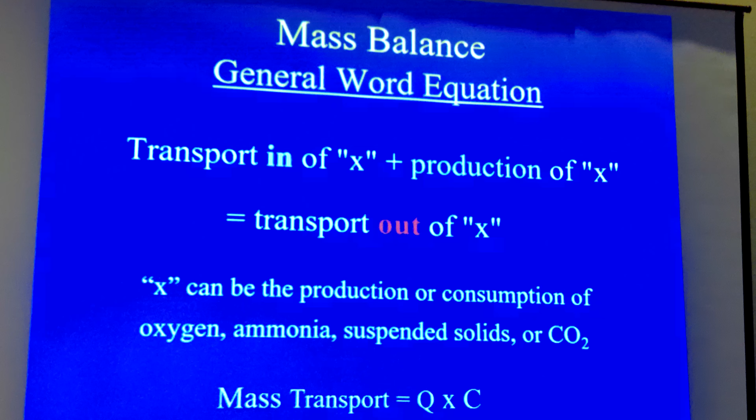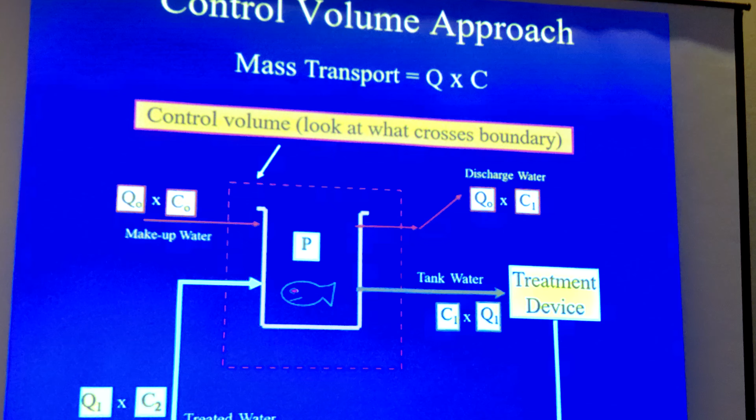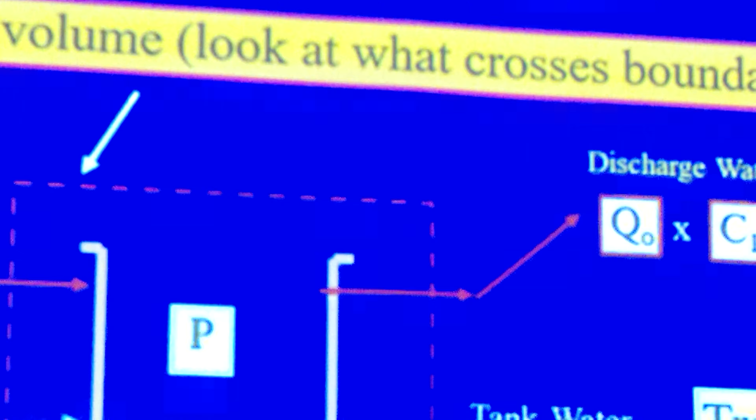Okay, so the key here is this flow diagram. Just look at that a long time. Engineers like to think of a control volume, that's the little dotted lines. And so that says, okay, that's what we're going to focus on. So things coming across the control volume line - is there a pointer? This black thing? Okay, so here's our control volume. So everything crossing this is the mass balance. So transport in - we have something coming from the outside. Those are makeup water.

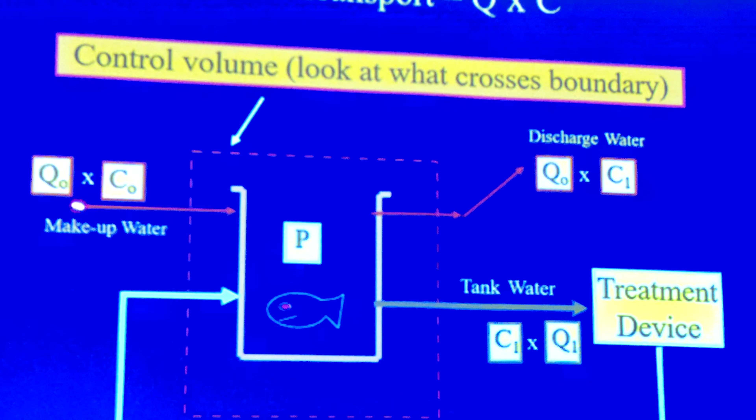If you had no makeup water, that's zero. Then we have things leaving - there's some discharge, and water that leaves goes through a treatment device and comes back. You don't see the treatment inside the control volume, just what's coming back in. So we have flow in plus the production of something equals the flow out of stuff.

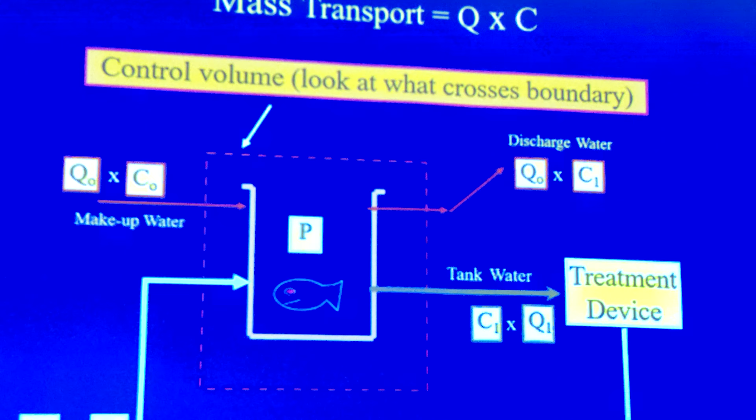So you set that up mathematically. Q is the flow term, this is the concentration term, and there it is mathematically.

Typically your makeup water is very small, so if you're doing rule of thumb quick calculations, you can just cross that off. In fact, as Bert was saying, what is the makeup percentage? Maybe it's like 10%.

What's our flow rate going around in circles? Let's just say it's once an hour to keep the math simple, or maybe twice an hour. So in 24 hours, that tank is going to turn over 48 times. Let's round it up to 50. And if we're doing recirc, 10%.

So put 50 in a percentage. 50 as a percentage is 5,000. So 10% over 5,000, you can just throw it away. Does that make sense? Even if it was 1 tank a day of throwaway, that's 100%. 50 is 5,000 - that's still 1/50th.

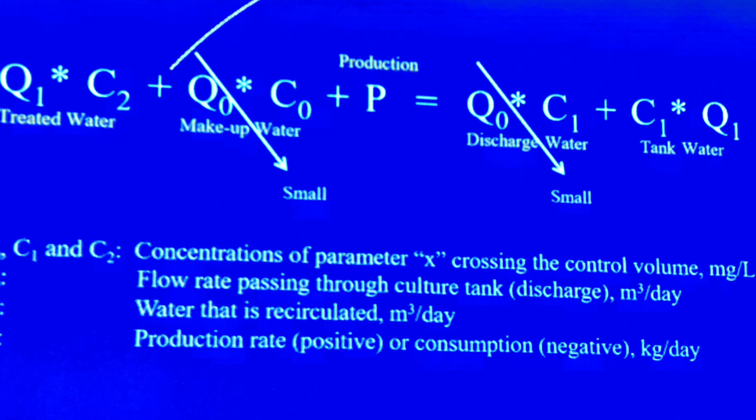So it's all about this recirculating term going around in circles.

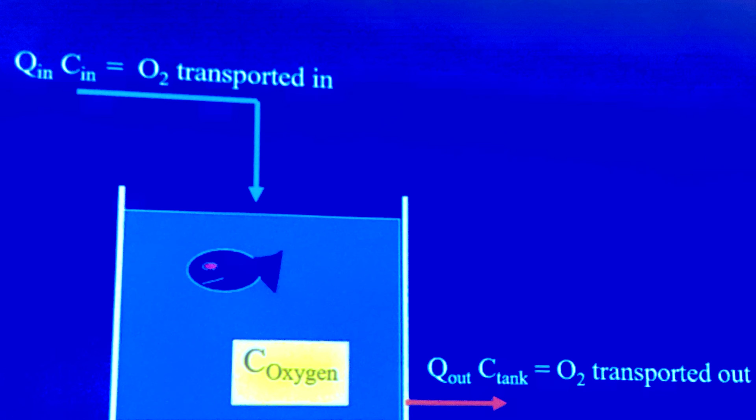So there's a unit balance - I won't bore you with that. There's our mass transport term. So I'll do a calculation for you, as an example, like available oxygen coming back into the tank, Q times C.

Let's do, in English, 100 gallons per minute. We change that into liters off the pump, so we get times our concentration in, and what we say, okay, saturation, at 9.8 milligrams per liter. So that gives us 5.39 kilograms per day of oxygen.

So, rule of thumb, is it for every kilogram of feed you feed, you need about a kilogram of oxygen. That's a rule of thumb.

So to trick my students, I used to trick Ed Anderson as one of my students - I used to trick him easily all the time. I'd say, so if I got 5.39 kilograms per day of oxygen, it takes 1 kilogram of feed per day, how many kilograms of feed could I do? And Ed would say, well, 5.39 kilograms. I say, wrong. Why is that wrong?

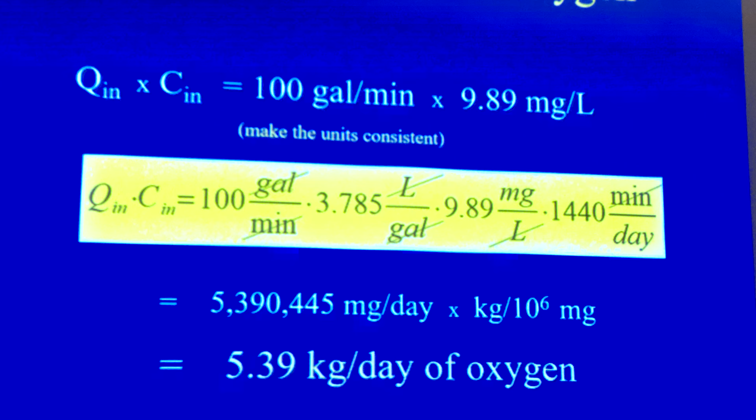Think. Why is that wrong? Because that would be if I took all of the oxygen out to 0. So you have to have some oxygen left over. Then the class quickly catches on.

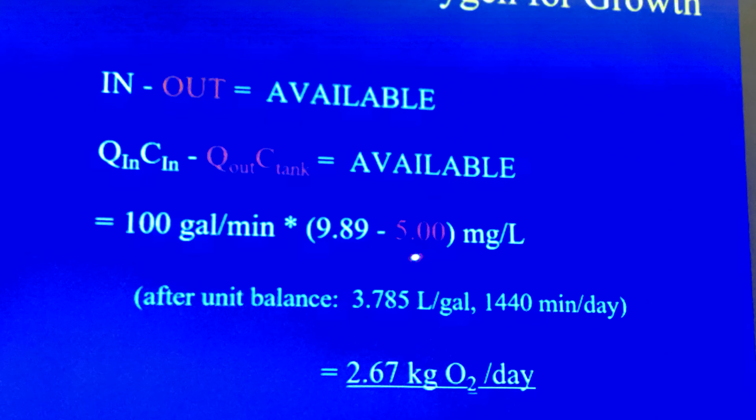So we talk about available oxygen. So maybe a design value for the tank might be 5. So now you got your saturation coming back from the treatment system or whatever, and then we have 2.67, for example. So this is one of the tricky parts - what do you set as your value for the treatment system to achieve to bring it back into the tank?

And so I'm an engineer, and so I'm kind of biased towards that. If I would talk to my, no offense to the biologists, how many engineers are in the room? Have any degrees in engineering? See, we're kind of the minority, right? It's kind of a funny thing, right?

So if we talk to our biology friends, they say, well, what do you want for the oxygen? And the biologist goes like, well, saturation, or something close to saturation. I go, well, we could do that, but I may not stay in business very long because it's going to cost you too much. So maybe we need to talk about economic optimal - that's going to first be below saturation.

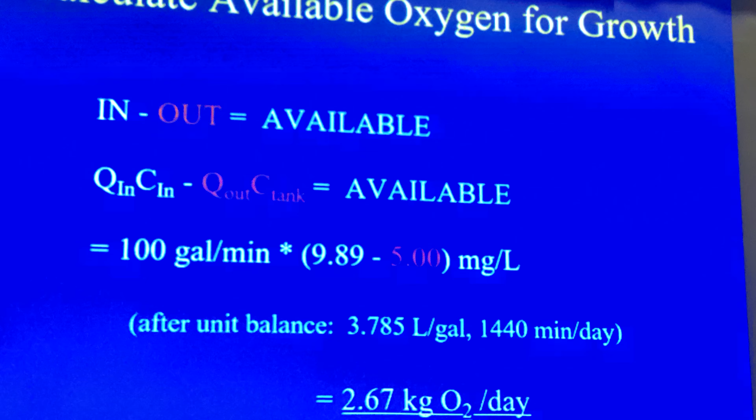Okay, anyway, have those again. So this is your job, as the designer or the consultant, to come up with these values that you're going to select. And there's a warm water species, tilapia, and cold water species, salmon.

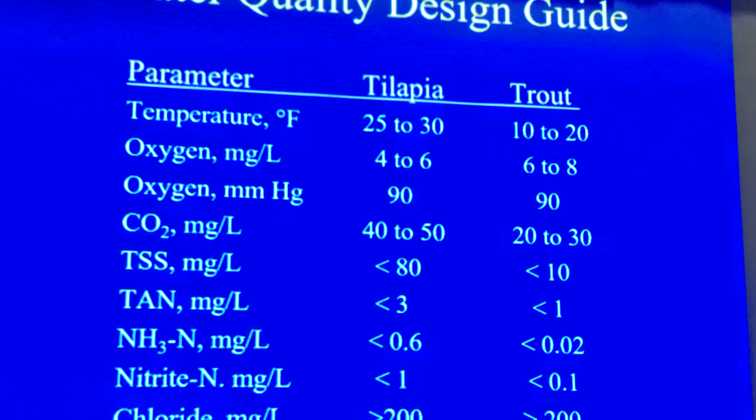These are kind of typical numbers that you might choose in this class. In this class, everybody's looking like that. So now we have to...